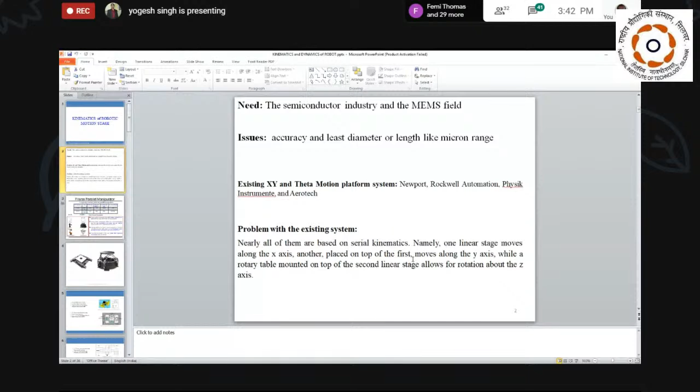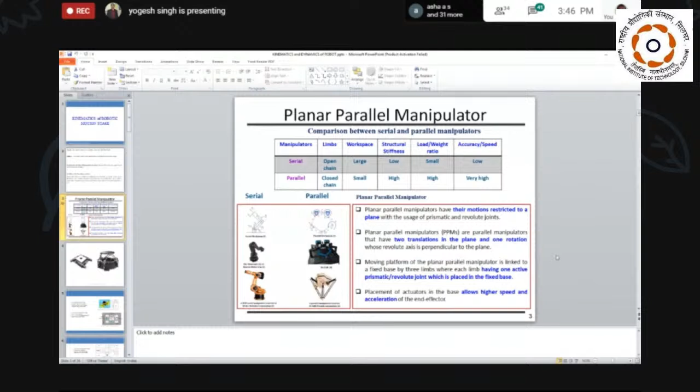Okay, so these are some platforms available which work at nearly the micron level. This is for the planar case and this is for the spatial case. So you can see again here you have some drilling machine. Okay, so now you can move your component as per the user requirement.

Means there is some object, and you need 4 holes on the object in 4 different locations. Okay, so how will you do it? You have to fix some drilling machine here, so the movement can be done by this particular platform. Okay, the same thing can be done here also.

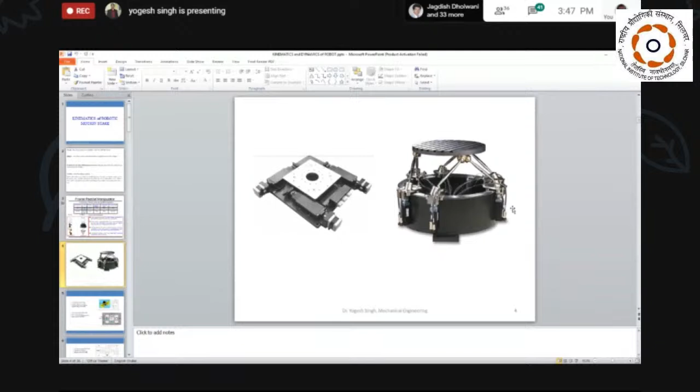Okay, so this is not fixed. This is only fixed at the micron level. It is not less than the micron level, means it will not go to the nano level. Okay. So for the nano level, there is some development going on. So I will let you know some development regarding that.

Okay, so what is happening in the last cases, these are the motors. With the use of the motors, we cannot move at the micron level or the nano level, because the motor itself is very bulky. Okay, so this is the platform, you can say. This is connected with this actuator. So these are not only your motor, it is connected with the slider or the ball screw, so the rotation is directly converted into translation.

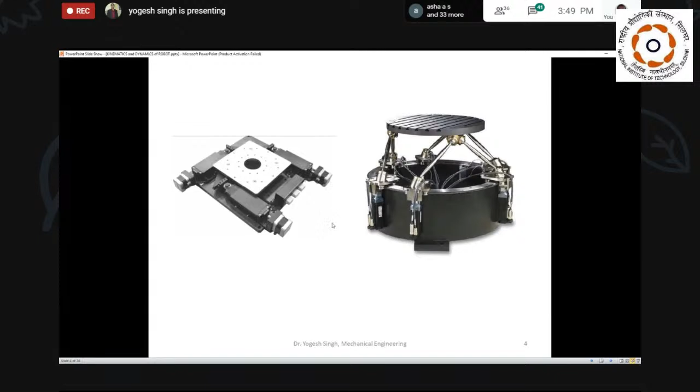So these 3 translations are again connected with some passive joints, and the passive joints are connected with this end effector. So because of these connections and only these 3 movements, this end effector can move in X direction, Y direction, and rotate about Z direction. Okay, so this is one phenomenon here. The same thing is happening, only we are going to change these actuators. These actuators can be piezoelectric actuators also. So in the piezoelectric actuator case, we are getting this much workspace.

Same as some other actuators we can use, like a voice coil motor, voice coil linear motor. And with the use of a voice coil motor, we can get like a 117.5 micrometer range of movement. Okay, so here these four actuators are nothing but your voice coil motors. So these are some other actuators we are using now.

One more concept is there. We can also go with smart materials. We can also use some other kind of actuator. It may further improve the movement of our manipulators or platform. Okay, so what will be those kinds of things? Before that, I will show you the research I am doing in that particular way.

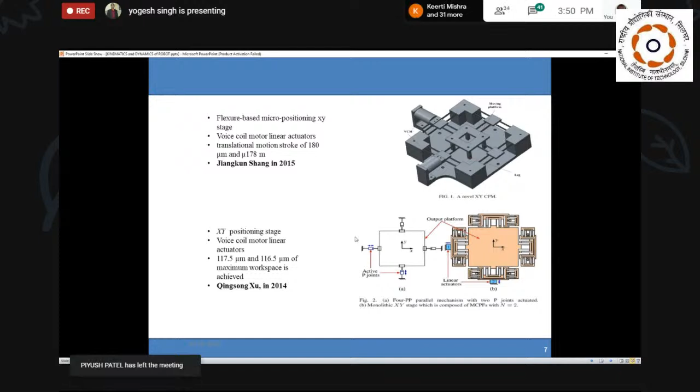Okay, so now these three translations can act as actuators. This can be any kind of actuator: your motor lead screw combination, piezoelectric, smart material.

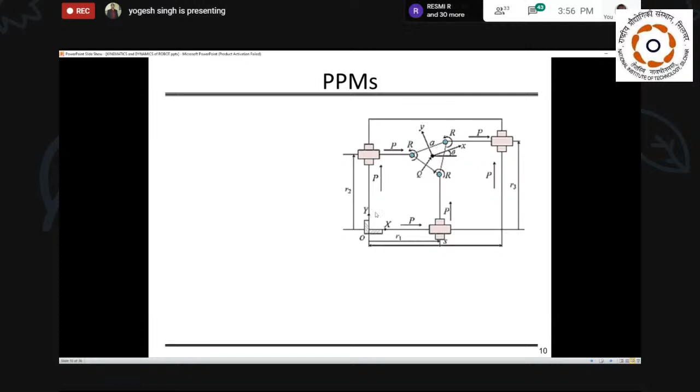So what does forward kinematics mean? It means you want to know x, y. That is the final goal. What will x and y be in terms of your joint values? The joint values here are R1, R2, and R3. So you want x, y as a function of R1, R2, and R3. Others are known to you; you only don't know x and y. You know the geometry of the plate, you know R1, R2, R3, so you can directly get x, y, theta. That is the first one.

The second one is called inverse kinematics. What is inverse kinematics? It means you want to get the values of R1, R2, and R3 as a function of x, y, and theta. It means you know the path. Just imagine that you have some object, and you want to go to some hole on the object.

For that, you know how many holes you need, like 4 holes. So you know the hole locations on the object, meaning you know the xy location of each hole. Once you know the xy location of each hole, you will put it in the end effector. So your major task now is to find out how much your joints will translate; only then can you get this x, y, and theta.

So this is one type of analysis you have to do. Only then can you validate your simulation: how much workspace, how far it can go. Suppose you have given some location, and that location will not allow your R1 to move that much. Then it is not possible for your object to move. So you need to first analyze whether these particular locations are possible or not. That is for the inverse kinematics.

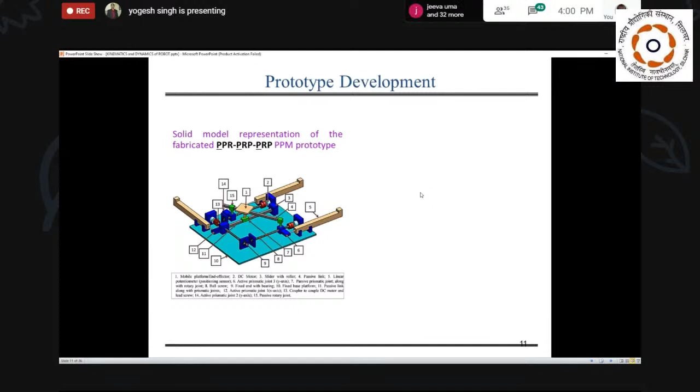We have taken that manipulator and performed some SolidWorks modeling and made it in software. After validating the software, we went through real-time validation. We made the same prototype and performed some experiments with some trajectory, to see whether it moves the same or not. That is for the millimeter range, not the micron range. Then we made a CNC milling machine for the micron range. This is the way we are using these particular systems.

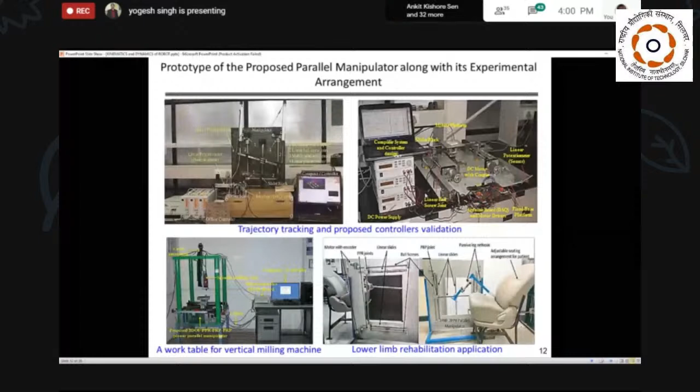Using that milling machine, we took a sample aluminum plate and gave different trajectories of the milling spindle, like a square one, so it cuts a square. You can see it is correctly doing a circular shape, triangle shape, and one complex shape, as I discussed in the previous slide.

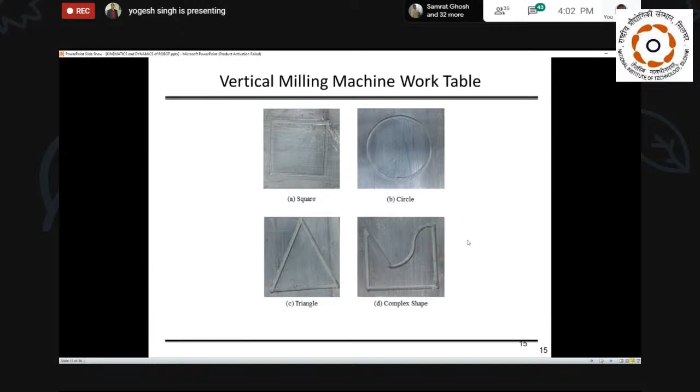Then we replaced it with the shape memory alloy. This is the shape memory alloy sheet. Now this is the primary stage and this is the secondary stage. So what is the quality of shape memory alloy?

The shape memory alloy quality is that once you deflect it, it will change its shape. Now once you heat it, it will directly get its original shape. So that is the phenomenon here. We have used this for the translation actuator: we first deflected it using a voice coil motor, and then we heated it back. It regains its shape, so it acts as a translational to and fro motion.

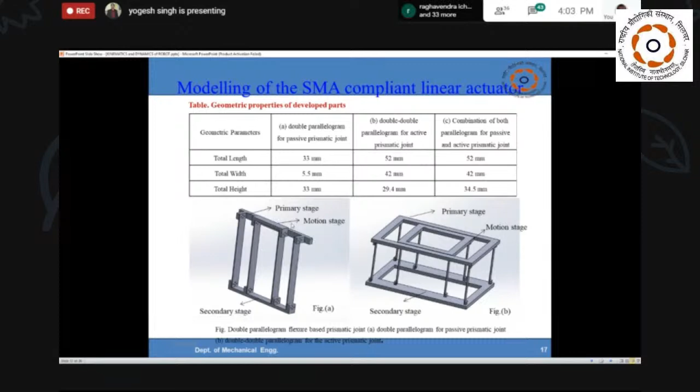This translation motion we used for further development in the motion platform, and we have done some research on that, and we find that it correctly follows the system. So you can see here, this is the platform itself. Here we are using the shape memory alloy spring, instead of using a slide like a motor ball screw. The first one is elongated, the second one is compressed. Here also one is elongated, one is compressed.

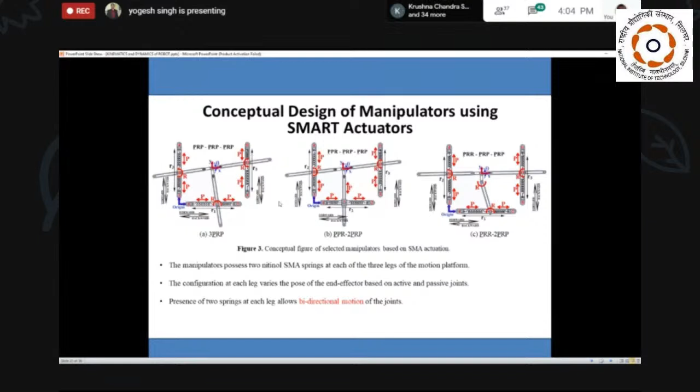Now you have given some trajectory to your system. So how will it follow? With the use of this actuation model of the spring only, it will follow. Once you heat the elongated one, it will try to compress, and the other one elongates. So we make an arrangement to find the trajectory values. This is what we are currently working on in our laboratory. So this is an experimental model we have done.

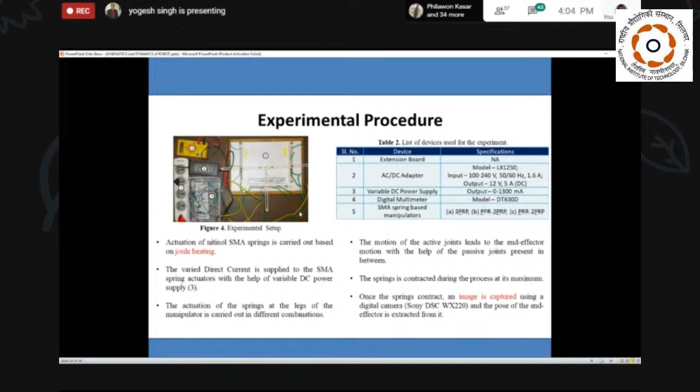You can see these are the simple springs, these are the links. We are giving power to them. It will try to move in this direction, in this direction, and in a combination of these three translation motions we can move our end effector. So these are the different experiments we have done. We moved the first prismatic joint, second, third, and then the first and second, first and third, second and third, and first, second and third simultaneously. These are the different values, and we found this particular workspace.

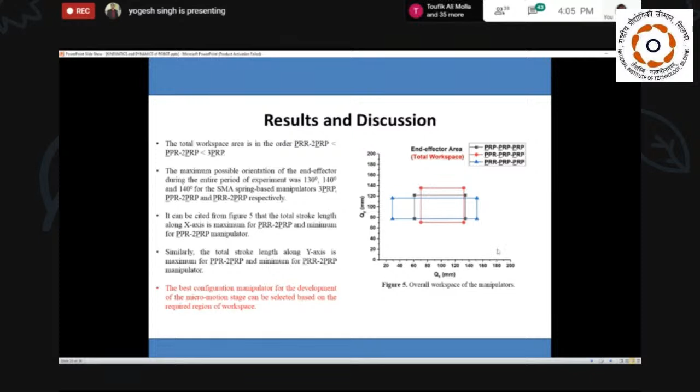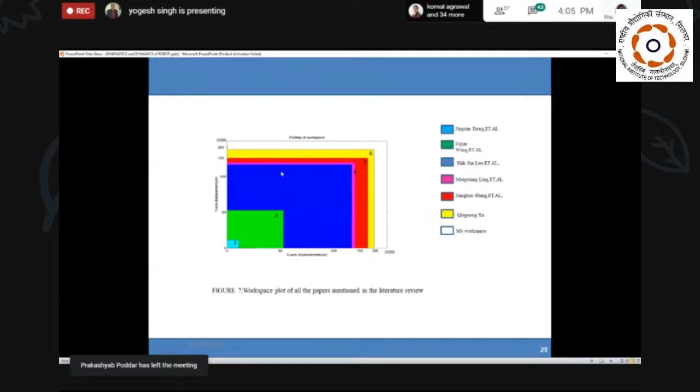So this is what is happening. Our manipulator's workspace is like that. It can go to a higher range as well as a lower range. What will be the lower range? Less than 1 micron. And the higher range? Greater than 35 centimeters. So this is one part we have done.

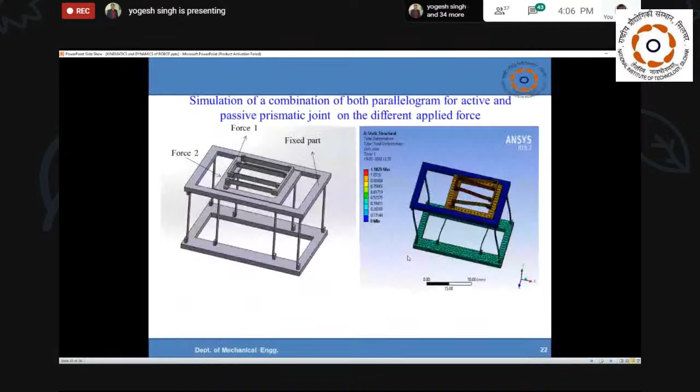Now I will show you, as I explained, the hands-on session on robotic kinematics using MATLAB. Here you can see the model we are going to make, how it will work, how we will make it, and how we will animate it. You can also try it at home, for any robotic system, not only this one. The only need is that you know the relationships for forward kinematics and inverse kinematics. Forward kinematics is finding x, y in terms of the joint values, and inverse kinematics is finding the joint values in terms of the end effector values.

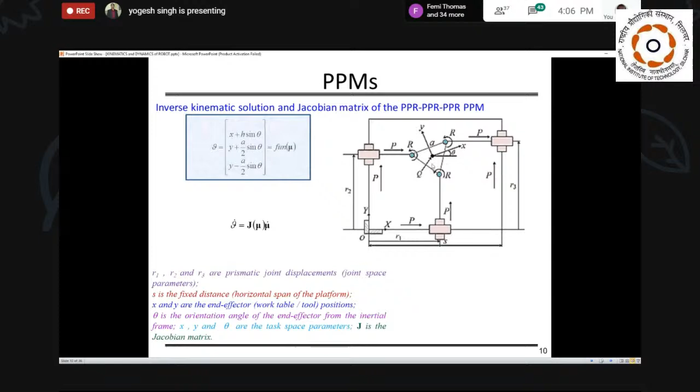So what we have done here, we have taken the same simple manipulator. We have given a circular trajectory to the end effector, meaning the x, y and theta values I have given already. Suppose you know your object should perform a circular trajectory. The circular trajectory extends up to 10 plus 3, meaning 13 millimeters maximum. So it can be a radius of about 6.5 or 7, approximately.

So that will be there. So now what happened? We have given some trajectory value first. Then we have to decide the given value. What will be the given? You know, now you know x, y, and theta. So you want to get what will be the R1, R2, R3.

So for that, what values you want to have? Other geometry, like plate geometry: how much the length of A, what is the height of this triangle, what is the side length of the triangle. Okay, so this is the value you have, the side length, the horizontal length, the width from this origin position to this one, what is the largest range you have. Okay, so it is given like 20 centimeters.

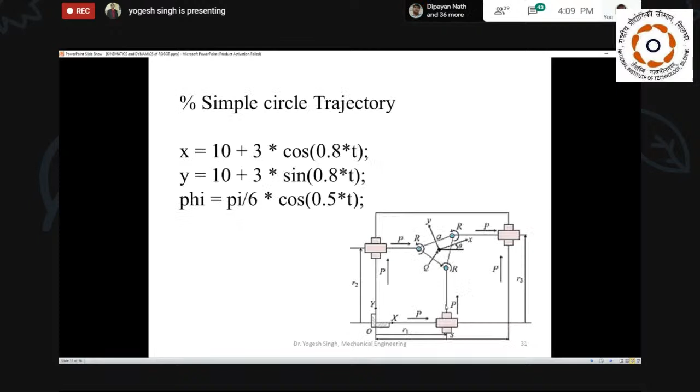Okay, so once you have given this one, then we have to define the forward kinematics formulation. So this is nothing but x is equal to S1 minus, some mathematical relationship we have. So we are writing these two formulas. That is very important. And this other formula is related to, you can see here, the lengths L1, L2 and L3. So what will be the length L1, L2 and L3? So these three relationships we have given.

Now once you fill all these relationships, you have given geometry for S1 L1, for S2 and L2, and for S3 and L3. Okay, so you have given the end effector, the end point of S1 L1, S2 L2, S3 L3. That's why it is written here: what will be S1, L1, S2, S3. So you have given some X coordinate and Y coordinate for that particular value.

So suppose here what will be your S1 L1, your S2 L2, your S3 L3. Once you have given the geometry, it will directly deduct, and these 3 points are making your triangular plate, which is exactly the same as whatever you have given. A is equal to 4, H is equal to this much.

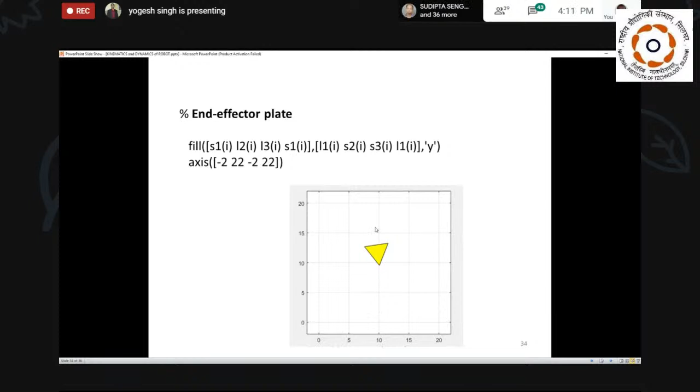Okay, once you have given this plot, the filling of those points, then you have to decide the other lengths also, the actuators also. So how it will look is like this one. Once you have decided this triangular plate, the circular point you have already given. So now once you fill this block, you have to give the coordinates: x1 y1, x2 y2, x3 y3, x4 y4, x5 y5. So this box you have given.

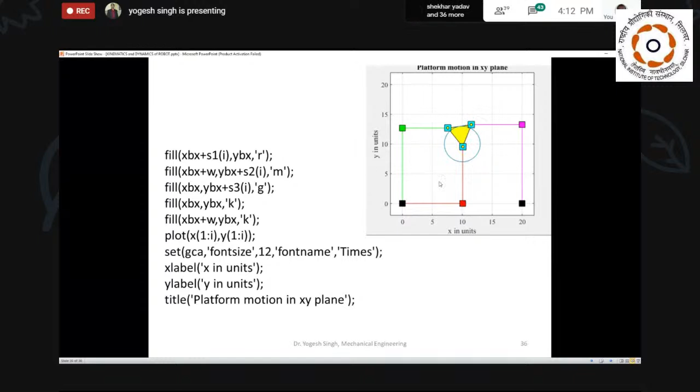That box is nothing but this relationship, like this is your first S1, this is your S3, and this is your S2. So once you use the fill command for all three, it will directly fill the lengths L1, L2, L3 as well as S1, S2, S3. So you will get this particular relationship. Now you can see it in the MATLAB code directly.

Okay. So now you can see here, we have given some 10-second value. Then we have given some trajectory, the same trajectory we have given. Then I have defined what will be the inverse kinematics and the forward kinematics. Simply you write your equation. That's it. Then you have to give your length.

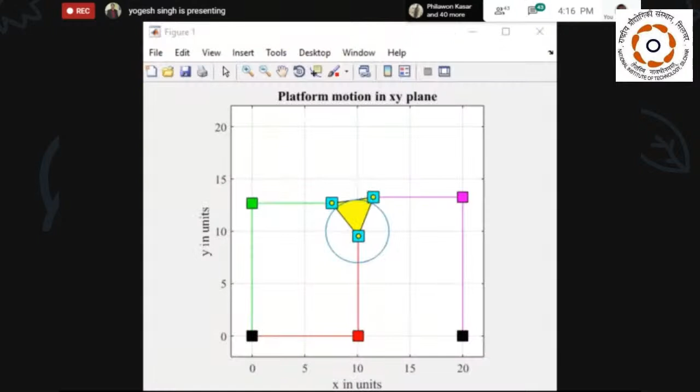Then, this is the way we are doing our work. We can model it, we can make some simulation out of it. A simple kinematic - there is nothing dynamic. For dynamics, it is very large - you have to first define some method to find the equation of motion, then you have to do it.

So for the kinematic analysis, you can do a simple analysis using forward and inverse kinematics. You can make this relationship and check whether your system is working or not. You have given some trajectory, some path, and check that path is followed by the system or not. Once you are satisfied with the result, then you can model it and go for the prototyping for that particular system. So this is the way we are doing for the research work. Now if you have any question, you can ask.

Dr. Vipin? Sir, it's Dr. Sudipto Chakraborty. Sir, please tell. Yeah, so you ask if any participants have any questions, so they can ask. Participants, if you have any question, you may ask, also you may write in the chat box. Let me check in the YouTube section whether they have asked any question or not. Till now there is no questions. Participants, you are requested to put your questions and doubts, whatever you have, in the chat box. I think there is no questions from participant side.

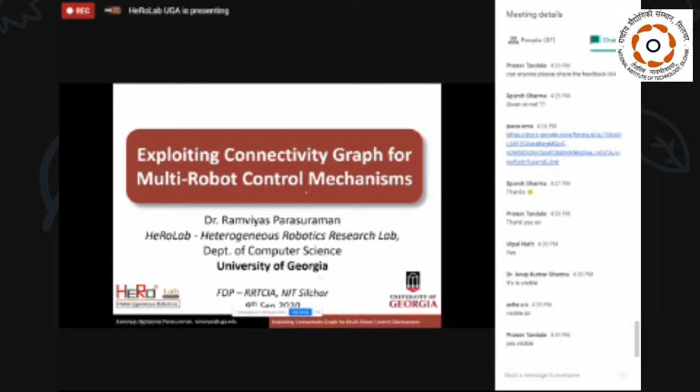Specifically, I'm going to talk about how we can exploit network connectivity and graph theoretic tools to enable or achieve multi-robot control mechanisms. As Dr. Anup Sharma introduced, I'm Ramviyas Parasuraman. I'm directing the Heterogeneous Robotics Research Lab at the Department of Computer Science at the University of Georgia, here in the US.

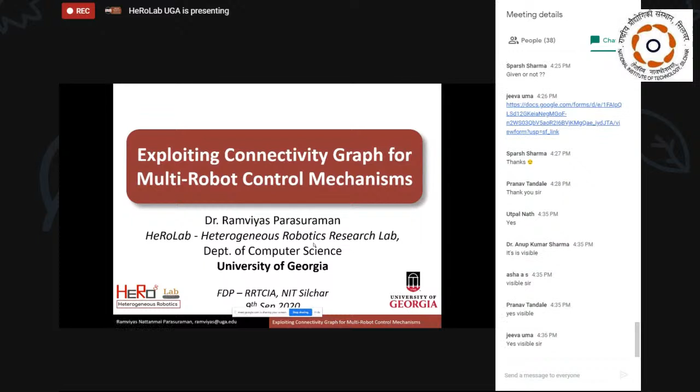Before moving to the actual talk, I want to give you a brief bio sketch of mine, and then I will introduce the general mobile robot and field robotics domain, the motivations for why I'm doing my research in multi-robot systems and field robotics in general. I will also give an introduction to the basics necessary to understand the research, such as graph theory and multi-robot control.

Then I will move on to the core research I want to talk about today, which is using graph theoretic tools to achieve multi-robot control. Specifically, I will talk about three different research areas. The first would be about how we achieve multi-robot consensus control using wireless networks.

That means, given a wireless network connectivity graph of a multi-robot system, how can we achieve rendezvous? Consensus means all the robots agreeing on a specific point to meet, or meeting at a specific point, which is otherwise called rendezvous. So I'll talk about how we can achieve consensus control if we have a wireless network graph.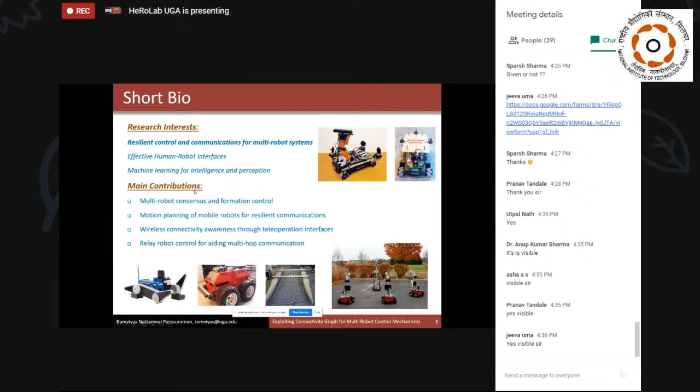As Dr. Anup Sharma said, I am currently an assistant professor at the University of Georgia. Previously I worked at Purdue University and KTH in Sweden, and before that at CERN. I did my PhD at the University of Madrid in Spain.

So let's move on to the problem domain we are going to talk about today: field robotics, and then multi-robot systems from the perspective of field robotics.

Many of you might be familiar with what mobile robots are, their applications, their scope, and the current state of the art. However, I just want to give a basic introduction of how a mobile robot could be useful.

A mobile robot could have multiple different forms. It can be drones, which can fly and are much more dexterous compared to ground robots. In the bottom left, you can see a ground tracked robot we call UGV, unmanned ground vehicle, equipped with a robot manipulator and multiple sensor suites on board to enable many autonomous capabilities.

You may also have seen humanoid robots. There are many applications for humanoid robots—for instance, in space, in the International Space Station, they have recently used a humanoid robot to assist with autonomous repair.

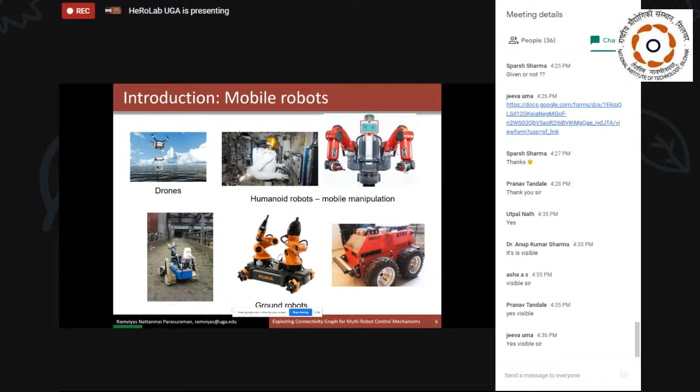I want you to understand the domain of field robotics in general—that means mobile robots operating in unstructured and dynamic field environments. This is completely different from domestic or industrial scenarios where everything is structured and known beforehand, so we can design applications carefully.

In a field robot scenario, the intention is that the robot should be available to deploy within a short amount of time, without knowing the environment beforehand. The environment could also be dynamically changing, so that when you deploy a robot today, it may not be the same scenario tomorrow.

For instance, let's assume a post-disaster condition where the situation is evolving every day. The robot should be able to adapt to such dynamics in unstructured scenarios.

One of the strong motivations for field robotics is how we can reduce hazards to humans by applying robots instead. For instance, in scientific or nuclear facilities, how can we reduce human exposure to nuclear or ionizing radiation?

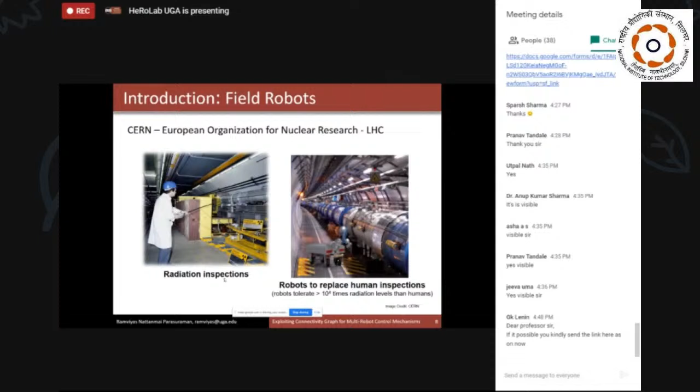So another strong motivation for this field robotics research is, again, in natural or even artificial disaster conditions, it's chaos everywhere. Then how can first responders effectively use robots as tools to help them, for instance, search for victims, search damaged properties, analyze and understand the situation, and then make decisions accordingly, or even, for instance, survey the damage made by those disasters.

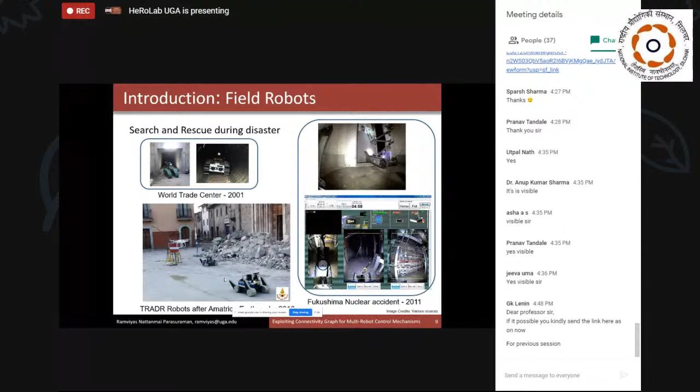For instance, robots were initially deployed after the World Trade Center collapse in 2001, and they have shown what the challenges associated with the robots are. For instance, wireless communication is a predominant challenge when it comes to deploying robots in a real-world scenario, because the communication in those days was highly intermittent, unpredictable and unreliable, especially because the robots have to transmit a large amount of data and also receive a large amount of data back to control them effectively.

And recently, in one of the European projects I was working on, we deployed robots after the earthquake in Amatrice, Italy. So we deployed multiple ground robots along with aerial robots working together to assess the damage to a very historical 400 year old church in Amatrice. And the robots were able to effectively produce a 3-dimensional map of that church. And we also realized a lot of challenges associated with real-world deployments as well.

So these kinds of real-world deployments of robots in those difficult situations help us understand what limits we must push the state of the art to, and also how useful the robots can be in such real-world scenarios. And also on the right side, you can see robots deployed after the Fukushima nuclear accident in 2011. They used several robots, but they also lost several robots while using them, because of challenges, again, with communication and also debris everywhere that makes it difficult for the robots to navigate.

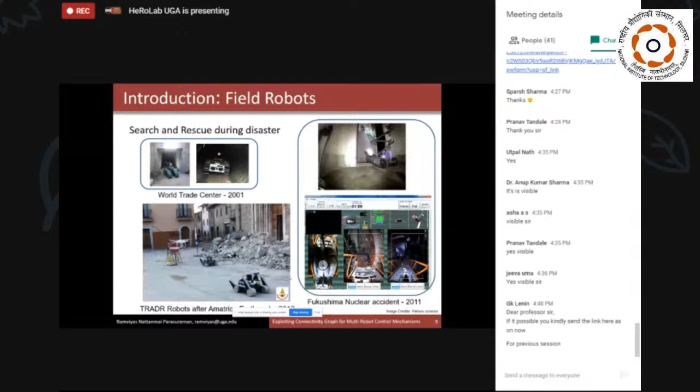Now, I want to talk about multi-robot systems. So far I introduced you to general field robotics, a single robot kind of scenario; now, how multi-robots can be useful. If you think of how single robots can be useful in those kinds of situations, multiple robots can in fact increase the performance and dexterity of the robots and the types of tasks the robots can do, and it adds scalability, flexibility, redundancy, and so many other advantages compared to a single robot system.

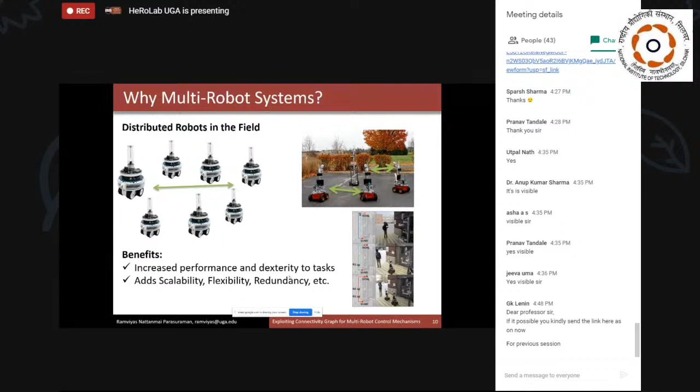And arguably, a multi-robot system is more difficult to control compared to a single robot system, because it adds more complexity on the other hand. So we should think of the multi-robot control problem also from the perspective of how they can achieve control in a distributed manner, so that they can talk among themselves without needing a centralized controller in place, because they cannot always have a centralized system in unstructured and dynamic scenarios. And also, a multi-robot system can work alongside humans in ensuring that their tasks can be done more efficiently and effectively.

Okay, so enough of the introduction. Now I would like to move on to the background that I want you to be aware of before moving on to the research. So the first one is about multi-robot control. So what are the control challenges or control needs for the multi-robot system, and also what are the basics of graph theory that help us enable some control mechanisms for the multi-robot system.

So here our agents are again mobile robots in a real-world field environment, and a very important challenge is that we cannot have a global map of the environment beforehand and also on an online basis, because the robots have to coordinate between themselves to create the global map, which is already an inherent challenge in itself. So the assumption generally is that all the robots have their local maps based on whatever sensing capabilities they have, and they should be able to share some of the data so that they have some global perspective or global information, but not a full complete map.

And also, robots are distributed in the environment, and they can only perceive or communicate with their neighbors. This also makes the real-world application more realizable. And there can be heterogeneity within the multi-robot system. For instance, some of the robots can be UGVs, some can be aerial vehicles, and in some situations, for instance, if you're thinking of an oil spill analysis or search and rescue in a marine scenario, there can also be unmanned surface or unmanned underwater vehicles that can be useful.

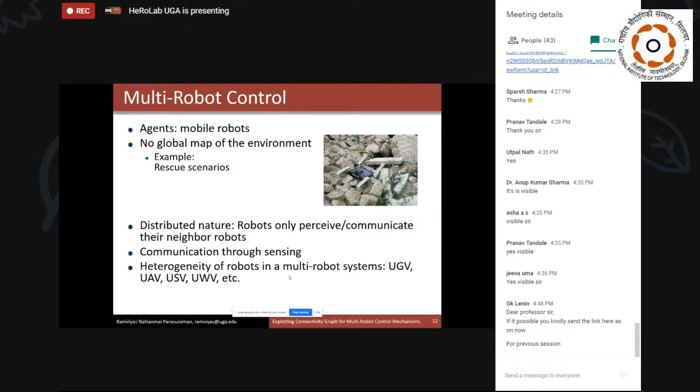And when you have a multi-robot system, there are multiple networks or multiple levels of network of local interactions that can arise, mainly depending on the locality of the robots, so the sensing range of the robots and the type of sensors being used on the robots. For instance, laser scanners have a wider range, but some laser scanners have a limited angle of view, and there are also omnidirectional cameras, or even omnidirectional laser scanners, that have a wider angle of view but also limited range.

And some sensors, like active sensors, are one-dimensional, or even sometimes zero-dimensional, so they can only measure points. Some sensors, like infrared sensors, can measure the distance along lines, so they are sometimes two-dimensional or one-dimensional. And the current state of the art used in industry, for instance in self-driving cars, is three-dimensional LiDAR, like the Velodyne LiDAR on top of the cars, which has interesting properties both in terms of range as well as accuracy or resolution.

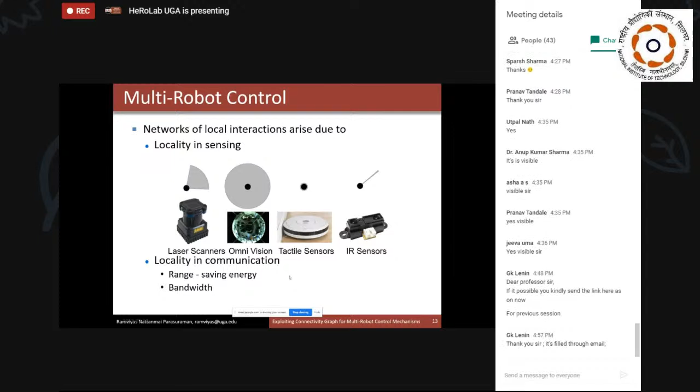So depending on the sensing and the locality of the robot, the communication is limited, so the robots can sense their neighbors and communicate with their neighbors. And they can also adjust their range; for instance, if some robot doesn't have enough energy to operate, it has to adjust the range so that it can save some energy or even bandwidth. So given these are all local characteristics of a robot, depending on them, they have to communicate and coordinate with the other robots in the network.

And as I said, there can be huge differences in the sensing capabilities, especially when it comes to whether a robot can sense in all directions, omnidirectional, or only in a specific direction, so directional sensing. Here you are seeing two different examples. If it's using an omnidirectional camera, you can see the neighbors in all directions, compared to a Kinect camera, which can see only in a specific front view.

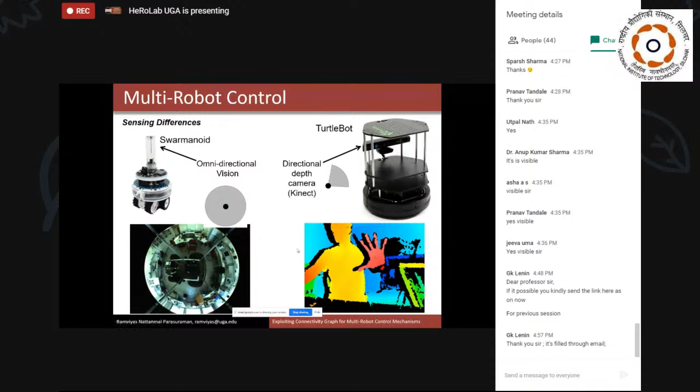And also, for multi-robot control, we can design several fundamental interaction protocols to achieve more advanced control mechanisms. The fundamental protocols are agreement, or consensus, which can also sometimes be referred to as the rendezvous problem. And then there are other fundamental protocols like formation control, coverage control, swarm control, and distributed estimation, state estimation. These are fundamental protocols necessary for a multi-robot system to achieve more advanced control mechanisms. And specifically for this talk, I'm going to focus on the agreement and consensus problem.

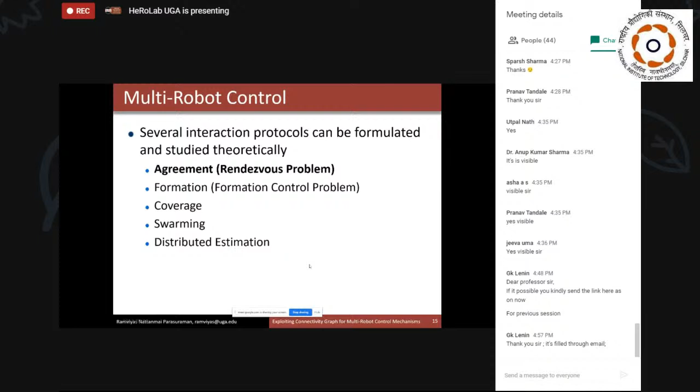So multi-robot control has several applications. I just gave one of the examples. For instance, let's say the application here is to increase the communication range and network throughput of a human first responder or firefighter in the real world. So what he has with him is, let's say, multiple robots that can autonomously move. Their only objective is to make the human communicate effectively with the ground station.

So then how can these relay robots, as we call them, which stand in between these humans and the ground station, convey the information from the ground station to the final human operator? And then how can we increase throughput in such an application? How can we enable autonomy of these relay robots in such an application? So these can be interesting challenges.

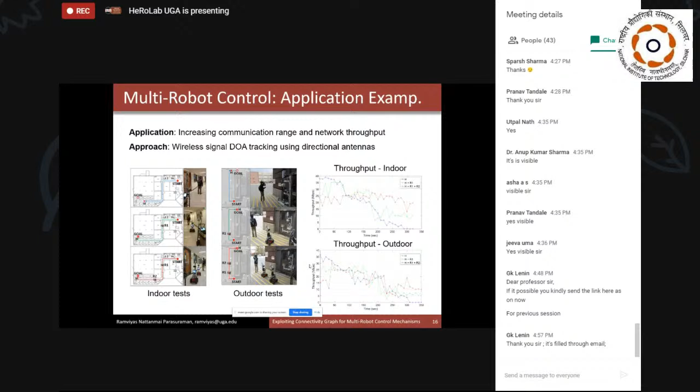So for instance, here you can see the robots are trying to follow and track the leader robot, which is, let's say, following a specific human firefighter or specific human end user. And these robots are using their sensors, in this case wireless communication devices, directional antenna sensors, to track the other robots, the direction and the distance, so that they can form an effective range and throughput for this end-to-end network.

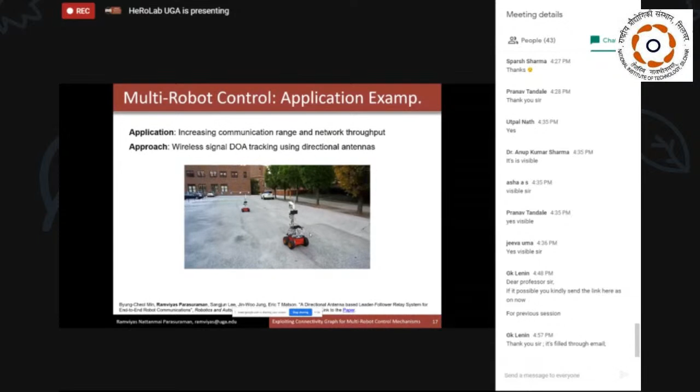Okay, so coming to the basics of graph theory. You can view a network of robots as a graph, where each robot is a node in the graph, and the links between the robots are edges in the graph. And depending on the sensor range, the sensing capability, whether omnidirectional or directional sensing, we can have two different types of graph, either undirected graph or directed graph.

So undirected graph means they have omnidirectional sensing capabilities, and also the information is bidirectional. On the other hand, in a directed graph scenario, the robots can probably either sense or communicate in only one direction, and they might have a constrained sensing field of view. So generally in graph theory, a graph is represented as a set of nodes, V, a set of edges, and a set of weights that can be attributed to the edges.

And graph theory has shown a strong potential in robotic networks, and it's a great tool for analyzing networks in general. It has applications in social networks, in wireless sensor networks, and so on.

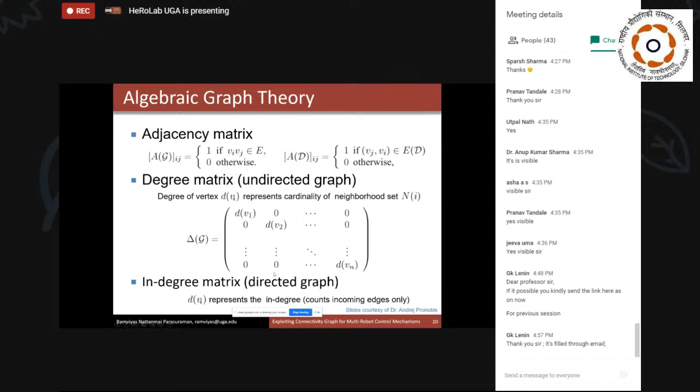And we can also express the degree matrix, which represents the cardinality of the neighborhood, that means the number of neighbors for each node. And we can define the degree matrix for both directed and undirected graphs.

And also, there's a very important tool that we can use from graph theory, which is called the graph Laplacian, which is basically the difference between the degree matrix delta G minus the adjacency matrix A of G. This will provide you a Laplacian matrix. Again, it's a symmetric matrix of dimension n square, n being the number of robots in the system. It provides useful mathematical tools with which we can make multi-robot control possible, and also analyze the theoretical properties of multi-robot control algorithms.

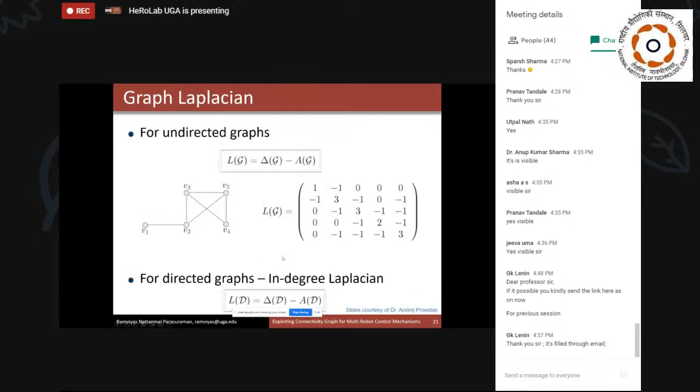And we'll come back later to this Laplacian and how multi-robot control is connected to graph theory. Any graph is connected when there is at least one path between each and every node. So if there exists at least one path from every vertex to every other vertex, then it's connected. It can be completely connected when all the vertices are connected to all the other nodes. So that's a completely connected graph.

And there can also be a very sparse graph, like a path graph or line graph, where one node is connected to the next node, and that node is connected to the next, and so on, either in a cycle or no cycle form. There can also be a tree graph, which is again a sparse graph with no cycles at all, but with some connection hierarchy. And there can be dense graphs, not necessarily fully connected, but still well-connected. These properties will help us understand how effectively multi-robot control algorithms can tolerate failures in the network or noise in the sensor data.

So as I said, we are dealing with the rendezvous problem specifically, where the agents have to agree on a specific value of a parameter. The parameter could be the point of meeting when we say rendezvous in general. So let's say you have n dynamic agents, and they are interconnected via relative links, that is edges in the graph, and then the agent state or the robot state depends on the neighbors, basically. The agent state being their position and orientation in a global context or global reference frame.

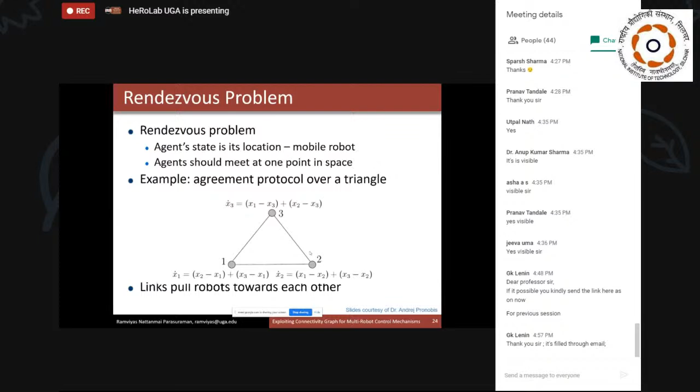So when we define the same agreement protocol mathematically using graph theory, we can use the graph Laplacian as I introduced before. So the velocity of each robot is minus the Laplacian times the current state of the robot, x of t. The state of the robot again is the position of the robot in the global reference frame. And we can define this kind of state space representation of this simple agreement protocol for both directed and undirected graphs.

So now let's get into the core research that I want to talk about, which is graph theoretic, network graph aided multi-robot control. First I will be talking about how we can achieve consensus control specifically using wireless network topology. Here, the objective is you have multiple robots in the environment having good communication capabilities, and they should be able to scan. We are assuming that they have a direction of arrival sensor, which is basically a directional antenna on a rotatory system, where we can rotate the directional antenna continuously and scan its environment to understand where the other robots are, especially the bearing, the angle.

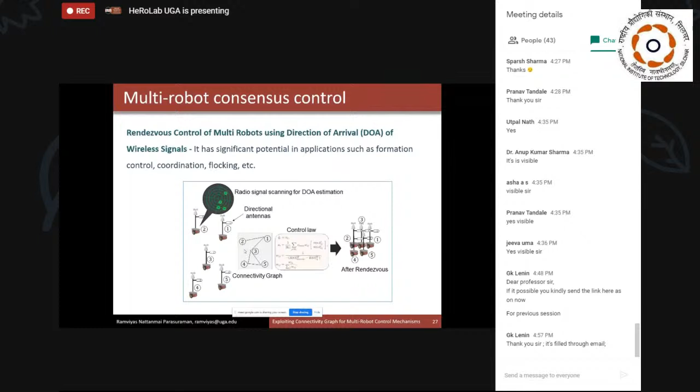So the idea is that we build the connectivity graph using the sensed data from the directional antennas of the wireless communication device, and then we devise the control laws that exploit this connectivity graph and the direction of arrival (DOA) data to achieve the rendezvous, where all robots come together. We are specifically using the direction of arrival of wireless signals because it has significant potential applications, both as a communication mechanism and as a sensing mechanism.

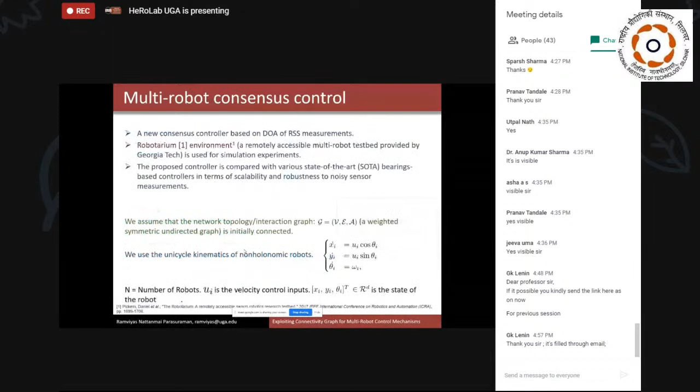So here I'm going to talk about a new consensus controller based on the direction of arrival of signal strength measurements, and we use a simulation or even experimental environment called Robotarium. Robotarium is a remotely accessible, freely accessible multi-robot testbed provided by Georgia Tech in the US. We specifically use the Robotarium environment for the simulation experiments that I'm going to introduce soon, but you can also use it to do real hardware experiments. Currently it's free of charge. If you look into the paper, the Robotarium, a remotely accessible swarm robotics research testbed, you should be able to get more information. They also have a very good website, robotarium.gatech.edu.

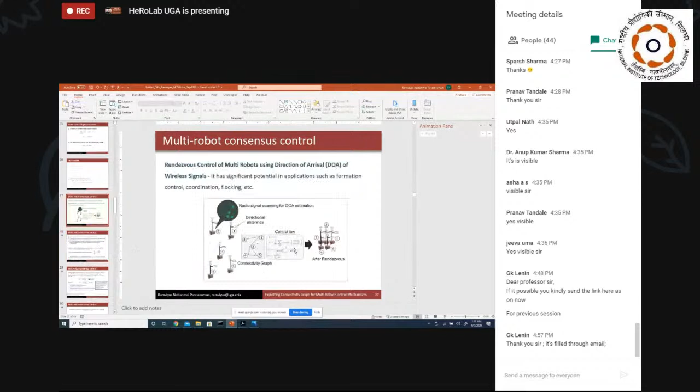So when we propose a new control method, we compare against state-of-the-art relevant controllers and verify them in terms of scalability and robustness. Especially we want to verify robustness to noisy sensor measurements, because sensors are always noisy. So how can we make sure that the control law we employ in this multi-robot control mechanism can ensure that the rendezvous is achieved within some finite time?

So as I said, we are going to model the whole network topology of the multi-robot system as a graph, which is a connection of nodes and edges and the adjacency or weight matrix. And we assume that the graph is initially connected. That means there's at least one path of information from one robot to another robot.

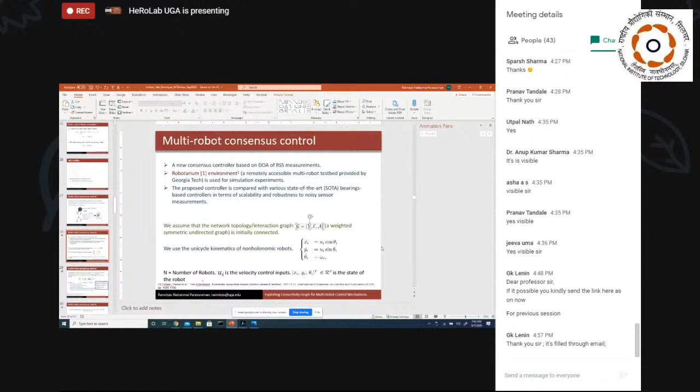And so this is the specific control law that we introduced. So you can see it's highlighted with W, the weight coming from the radio signal strength that we measure from the directional antennas, and we apply a threshold radio signal strength that can provide us a minimum threshold which it has to have to achieve some specific throughput. And that can be adjustable as well, depending on the context, depending on scenario, and can be dynamically adjusted as well, and also depending on the robot's capabilities.

And also this control law involves the phi of j, which is depending on the DOA of the measurements. So there are two measurements. One is the signal strength, which is the kind of magnitude of the signal, and then DOA is the angle of the neighbor. So we use both of them fused in this control law to make sure that we can guarantee the rendezvous objective. And while the robots are achieving rendezvous, they should keep their links.

They can add more links, but they should not lose any links during this process. And we can theoretically prove that this control law can help us guarantee this link maintenance during the rendezvous process. And also they have to be distributed. That means a robot can only sense its neighbors and communicate with neighbors, without any global coordinate frame of reference. So they can sense the neighbor's position with respect to their own frame, not with respect to any other common frame of reference.

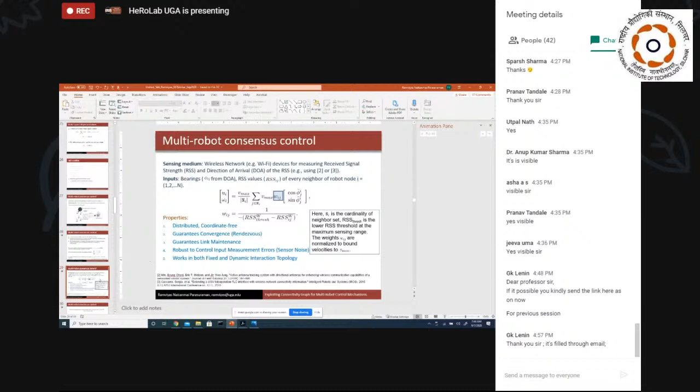So we verify the robustness, for instance, to the sensor noise in the Robotarium experiments. We add some sensor noise to the sensor data, and here you can see simulations of 15 robots with a lot of sensor noise. And we can compare the proposed method, which is here, with the state-of-the-art and baseline methods. The baseline being the one that I introduced earlier with the rendezvous problem, where they simply go towards the average location of the neighbors. And there are also several other bearing-based multi-robot consensus controllers, graph theoretic consensus controllers available in the literature, and we compared against them.

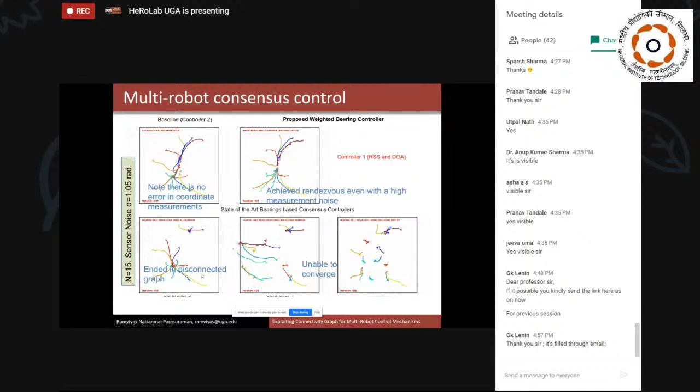So here, for instance, some of the controllers cannot achieve the rendezvous in finite time, while some achieve it very slowly. And to make sure that they converge, achieve the rendezvous, and also maintain the link while doing the rendezvous, we also use a Lyapunov-like candidate function to prove the stability and convergence from the theoretical perspective. More details about the theoretical proofs you can find in the paper. I will provide the references to the paper at the end of the slides.

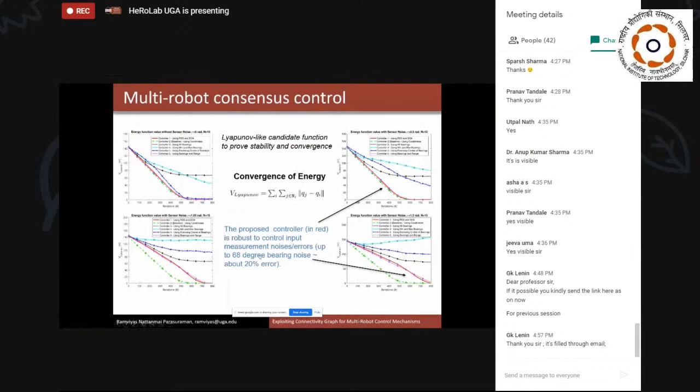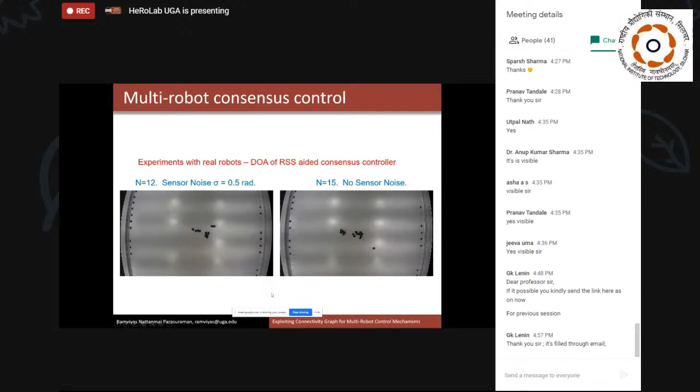So now I'm going to move on to the next part of the talk, which is how do we achieve this multi-robot rendezvous when you have a different set of sensors. Again, we have this mobile robot equipped with the rotating directional antenna that enables us to measure the direction of arrival of the neighbors and also the distance of the neighbors. And in addition, we also have several other sensors on the robot to make sure it can avoid collisions with the other robots or with the objects in the environment.

It has proper onboard computing capabilities so that it can do distributed computing on board. We first built the global graph of the multi-robot system, the global network graph, through a distributed communication mechanism.

Here you can see the robot communicating with its own neighbors, and then sharing that information with the neighbors. For instance, robot 1 tells robot 2 that its neighbors are robot 2 and 3. Then robot 2 will share its own network information, its local neighbor list.

By sharing, they continuously iterate this sharing process, and they stop sharing when there are no more updates, no changes in the neighbor list of all the robots. Once they reach that condition, that means they have converged to the global graph, the ground truth global graph, achieving the building of the global connectivity graph in a distributed manner.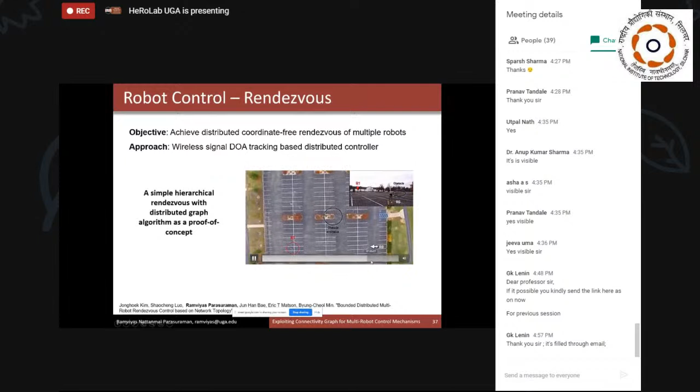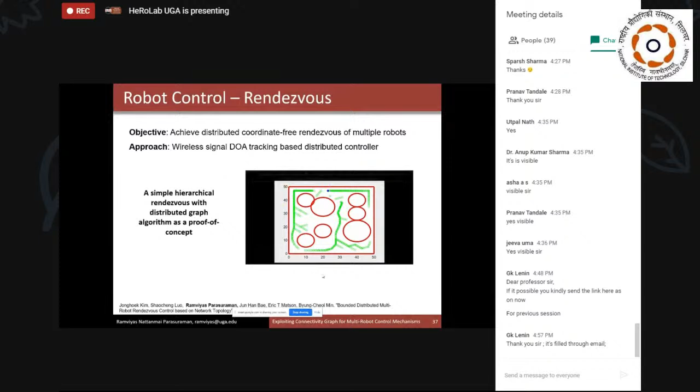We also tested scalability in simulation environments, because we do not have that many robots in terms of real hardware. So we limited the hardware experiments to specific properties, while using the simulation environment to test scalability, increasing the scale of the robots in the multi-robot system.

Next, I want to talk about multi-group herding, where we split the robots into multiple groups, and then they achieve both rendezvous and herding to a common destination for each and every group. How can we achieve that in a distributed manner, and how can we use graph theoretic tools to achieve that?

So I want to introduce this problem. Let's say you assume an environment which is cluttered, so there are a lot of obstacles in the environment, and you assume a network graph of the robots. Each and every circle here is a robot, and the dotted lines represent the links between the robots, the connectivity graph. It could also be a sensing graph.

The blue circles are the regular robots, while the green circles are the leader robots, which have advanced capabilities compared to the regular member robots. Here, the advanced capability we're assuming is perception, where only leader robots can pursue a specific destination given for them to go to. Let's say they have 2 destinations and 2 leader robots, where each leader robot can take a certain group of members to the specific destinations.

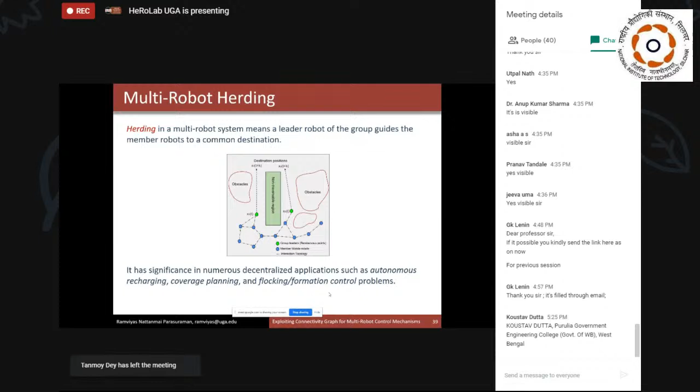First, we define rendezvous, multi-point rendezvous, meaning multi-group rendezvous, as gathering robots at the leader in different groups. Herding is an extension of this rendezvous, where once they achieve the rendezvous, they move together with the leader robots. What we propose here is a distributed control strategy to achieve this multi-point herding, an extension of the hierarchical tracking of the connected graph that we looked at earlier.

We're specifically interested in the following properties: we want to guarantee convergence within each group, since there are multiple groups here, and make sure within each group they converge to the leader robot. While they do so, they maintain connectivity within the group. We also want to ensure that the leader robots are connected, so we can have connectivity between the groups, not just within the groups.

We also want to make sure that the control strategy is capable of handling minor faults, like being tolerant to robot failures, either mobility or communication failure.

Again, we assume that initially the robots are connected, not fully connected, but just connected, at least. We represent the robot network as a graph with nodes and edges, and we assumed a single integrator model for the robot dynamics to simulate the robots.

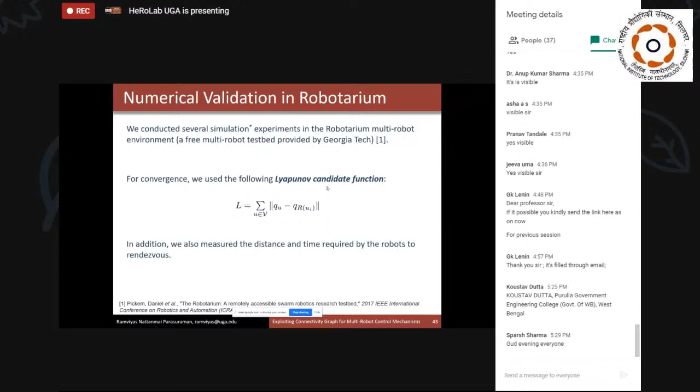We also use the Lyapunov candidate function to verify and analyze the theoretical properties. And we also use Robotarium as a multi-robot test bed for both simulation and practical experiments, because the Robotarium is freely available to test such multi-robot applications.

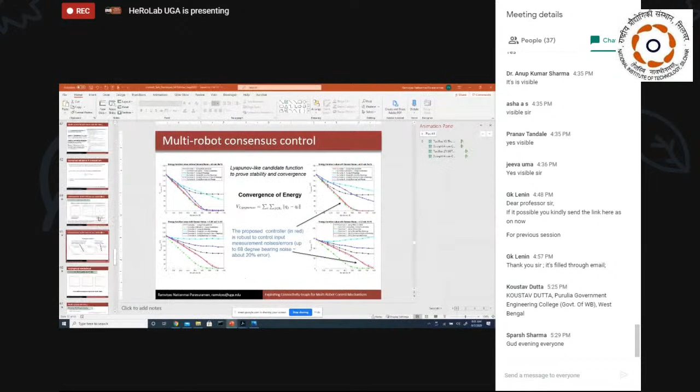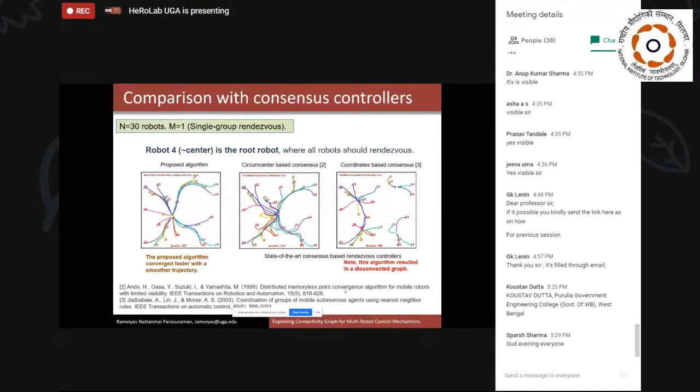We also analyze the convergence result using the Lyapunov function. Here you see multi-point rendezvous, with multiple robots assembling into multiple groups, either two-group or three-group. For instance, robots 13 and 15 are leaders in one case, and you see three groups forming. They distributedly communicate to figure out who their leader robots are. Once they identify the leaders, they build the graph, and then communicate within the group to achieve rendezvous at the group leader using hierarchical tracking of network topology. So here you have 3 groups and 3 leaders, and here 4 groups and 4 leaders.

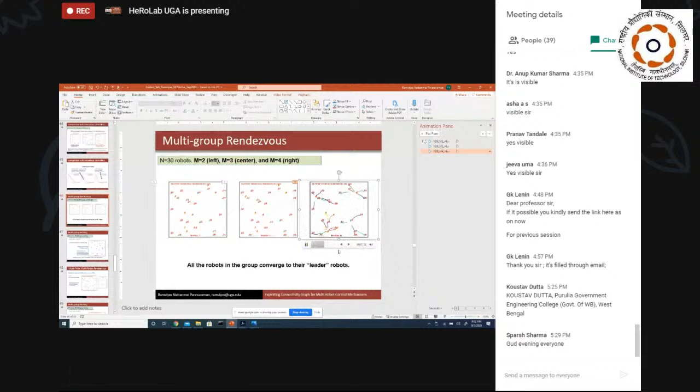Now you'll see how we achieve rendezvous, and then how we achieve herding after the rendezvous. In this example, herding starts after the 2-group rendezvous is completed. All the robots go towards their leaders 13 and 1, while the final destination is the points indicated with stars. Once they achieve rendezvous, they move towards their final destinations. This is herding after rendezvous, and we verify that this is possible.

We also verified multi-point rendezvous and herding together, meaning the robots do not wait until rendezvous is achieved. The leader robot starts moving before rendezvous is achieved, so they can save time and be more efficient, while still making sure they always converge. Here you see they achieved faster herding compared to the previous example.

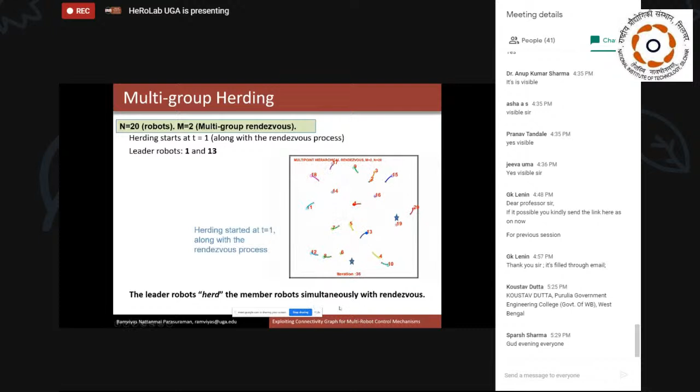This is another example where both herding and rendezvous started at the same time, which is much faster than the previous two examples, while still keeping the convergence properties.

This is an example of the same multi-point rendezvous, for instance a single group rendezvous experimented on the robotic hardware platform. These are the initial locations, and now the algorithm has started, trying to achieve a single location rendezvous. And now this is a two-group rendezvous.

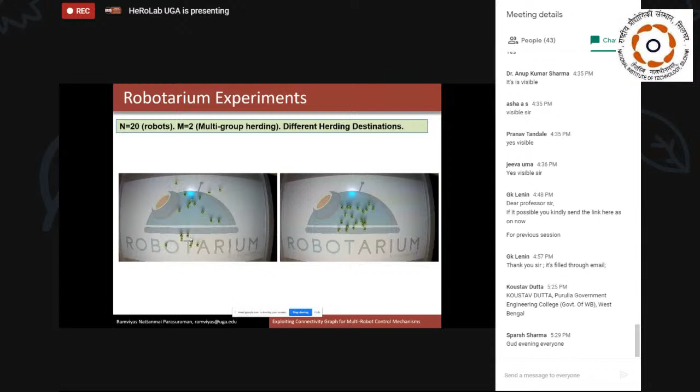It takes time for the robots to reach their initial positions first because of the robotic platform, and then they try to achieve rendezvous in two different groups.

Now this is an example of multi-group herding. Once they achieve rendezvous, how do they proceed? These are the initial locations, and now they're doing herding and rendezvous at the same time. Once rendezvous is achieved, they move towards their destinations here and here.

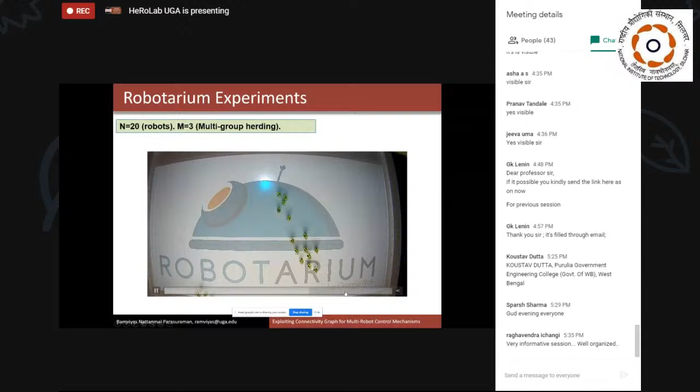I want to summarize what we talked about so far: multi-robot control has tremendous potential for real-world applications. I introduced the challenges associated with deploying multi-robot systems in real-world applications, and how we can deal with some of those challenges. I also introduced graph theory and graph theoretic tools, and how we can use them in enabling multi-robot control applications. We looked at specific examples of how graph theoretic tools and control laws achieve multi-robot rendezvous, multi-robot consensus control, and multi-robot herding. I also showed examples of how we prove these solutions experimentally, especially using the robotic platform I presented, in terms of scalability, efficiency, tolerance to failures, and the dynamic properties of the control law.